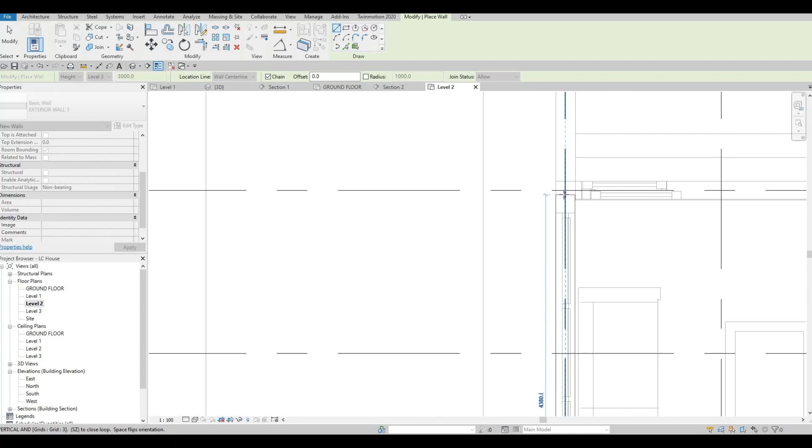So the difference between this one is what are we gonna do after we add this? It's because we're going to extend some of this, because we're going to add balconies in front of here. So we're going to add it there, and then all the way to F5 right here.

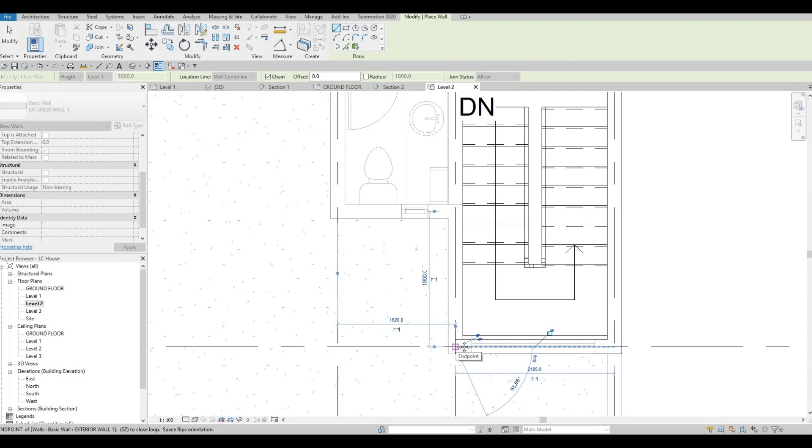So we have our stairs right here. So we're going to have it all around right here. The only difference is that once we go to F4 right here, we need to just pull it up and we need to type in 780. Once we do 780, we need to move this one to number 3 grid line.

So basically we need some space right here. And then we need to go back again right here, mimicking what we have below. So that's E3, and then going back again right here, mimicking below. And then for this one, we need to go all the way to F2, and then we need F1, and then here closing off to D1 again.

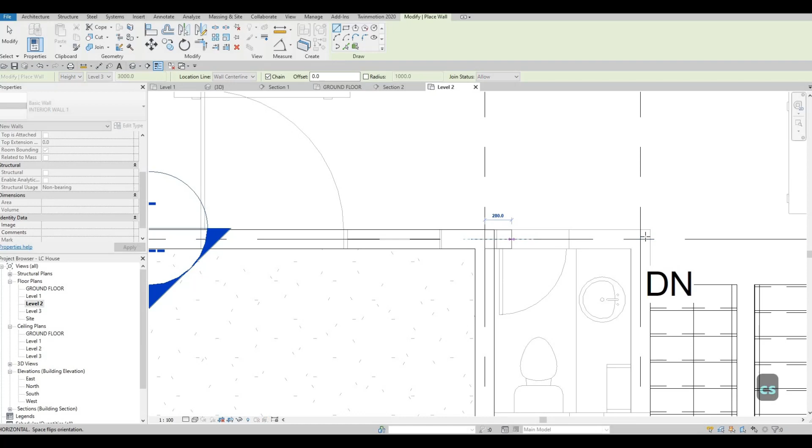So now what we're gonna do is we're going to add an interior wall similar to this. So we could select that below, CS, and then we're going to connect it as well right here to cover off the stairs. So here we have it, I believe right here.

So now we have, this will be a washroom, full grown washroom. That's why we extended it a little bit, but at the same time we cover this one, and then we have a stair right here.

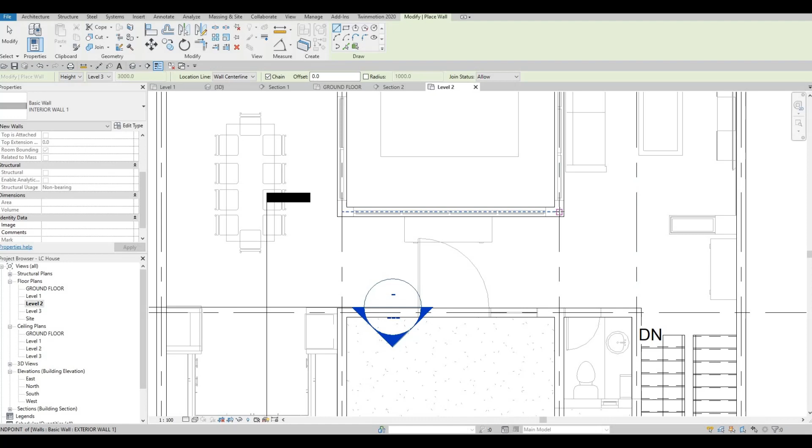Again, we're going to CS on this, and then we're going to extend this one. So let's go from this endpoint to right here, this will be our master's bedroom. This will be another bedroom right here.

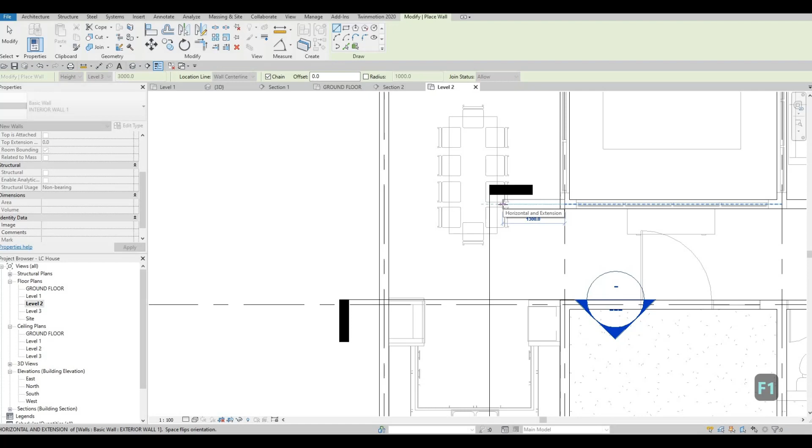But at the same time, what we're gonna do is we're going to add in a door right here. I'm estimating right now around 1,000 from here. So I'm gonna put in 1,000 and then add it there. Here as well, go 1000 and add it there, and then we're going to connect them.

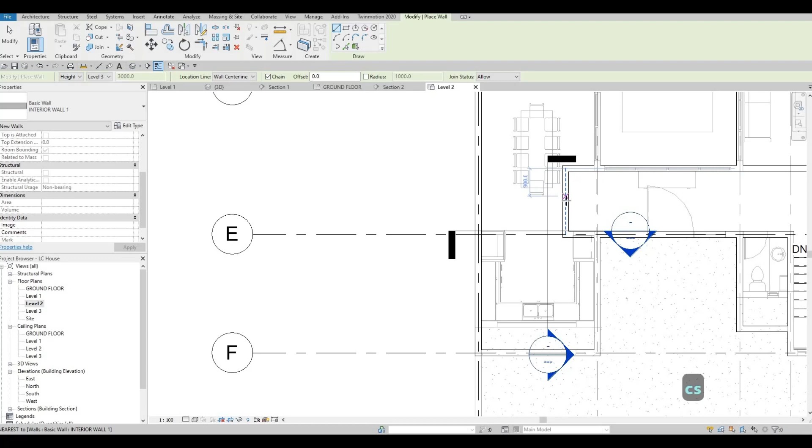And then after that, we're going to add the same one in the midpoint. So now we're basically indenting this so that it's easier for us to add in the door.

Actually, instead of 1000, let's do 1100. So why not add 1100? And then here we have the door opening right here, and then at least we will be able to use this area to add in our closet. So that's how it differs on that.

At the same time, now that we're adding all this stuff, why not add the toilet right here as well? So CS on that, and then add it right about here. So anything that we could add it now. Even the door, so that we don't look for the other doors anymore.

So CS, we could add the door right here. Even though it's 700, we could change that to 800 or 900. But you want to maintain the 2000.

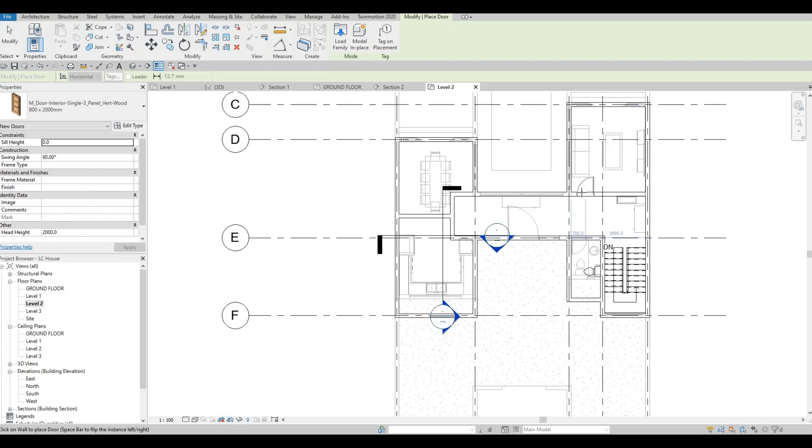So spacebar right there, and then here we could do spacebar and add it on that side. And then move this one on the other side, and spacebar on that. So we added those stuff right there, and I believe we're good enough on this space that we don't need it anymore. So what I'm gonna do is turn off the underlay by putting this to none and leaving it like that. So now everything makes sense.

So here, CS, we're going to put this one to 700 again, similar to below, and then adding it on this side.

After that, we're going to add the exterior wall again right here, and convert this to interior wall. So what I'm planning to do is we have the D here, and this one is just 500, so CS on that, just 500 from the top. This is what we're going to add in order to create a washroom and a walk-in closet for our master's bedroom. So now add this wall right here.

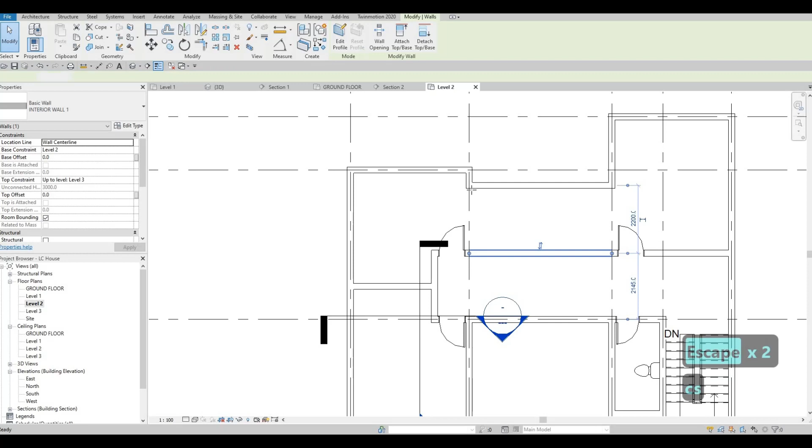We could basically move this back right there, and then change this to interior wall, and then from interior wall CS again, and just connect them all together. If you're not anal like me, you could just leave it like that and add another one right here. It doesn't really matter if you're changing it, but I just want it to be organized a little bit, and add those kind of stuff.

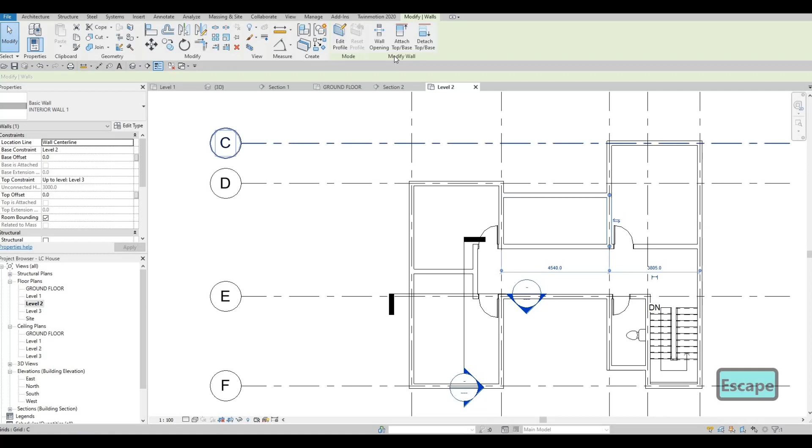At the same time, what we're gonna do is create an opening. So here I'm selecting the interior wall, and we have a wall opening right here. I'm gonna select that and add a wall opening. You need to click it twice in order for that to show. This one is easy to change — you can just grab that or put in the required dimension that you want. So it's really up to you depending on the space and how you change it. It's basically an opening for our wall, but there is still a wall there.

Now what I'm gonna do is also add another wall inside to separate the walk-in closet from our ensuite. So I'm going to select this wall, CS on this, and add it first, and then dimension it from here. It should be around 2130 — that is the space that I needed.

So I'm going to select this one, CS, add it right here. Oh sorry, so add it right there, delete this one, and then this door, CS again, and add the door right here. But we're going to change it to 700 because that's the size of the door that we want for our washroom. So now I'm just adding that. Hopefully you guys are envisioning what we're trying to do here.

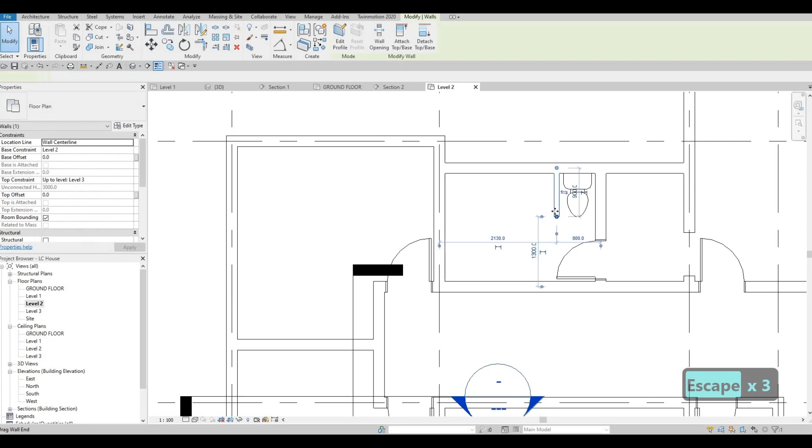I want my toilet to have a separation, so I'm gonna add in a small wall, probably 100 thickness. So select that, edit type, duplicate. This will be wall, interior wall number 2, and change the thickness to 100. At the same time, I'm just going to add it right here. So change this one, I'm just gonna add that right here first, and then change this back to number 1. So just my sequence messed up there, but that's good enough.

And then here I'm planning to add a freestanding tub. That will be very nice to have, and I'm planning to make this nice. And just because it's ensuite, double sink here — I'm planning to add a double sink as well. I think that will look nice to have a double sink. And then let's add in the same design that we have probably.

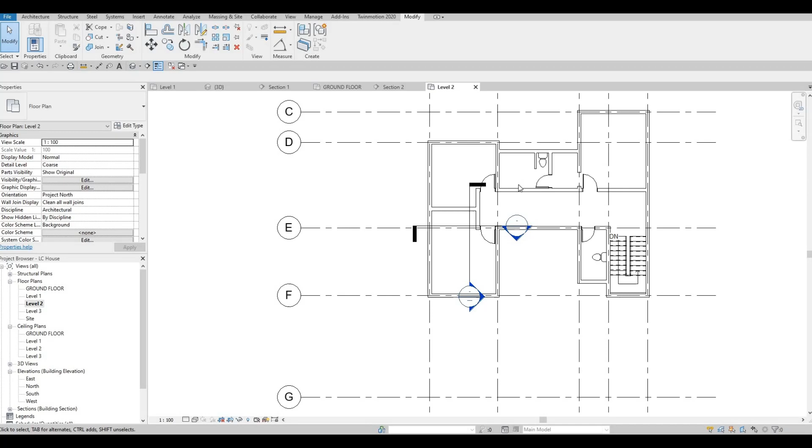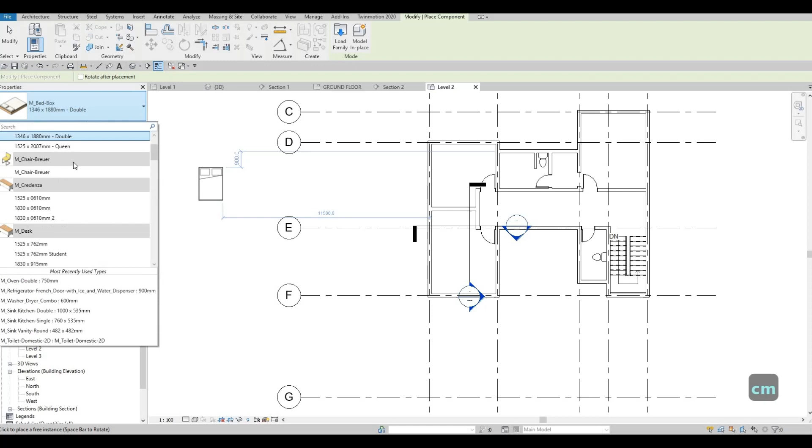So in order for us to see it much better, I'm planning to insert the bed. Let's go to insert, load family, and go back to furniture. Go to the main and look for furniture. We have beds here, and I usually just use this one. Click on open, CM, and then we have the bed right here, but we're going to change it to double.

So that's why I go to the drop down, and then let's add the bed like so. And then I'm just trying to add it properly and then spacing out. So this part, this will be the extra room that we have right here.

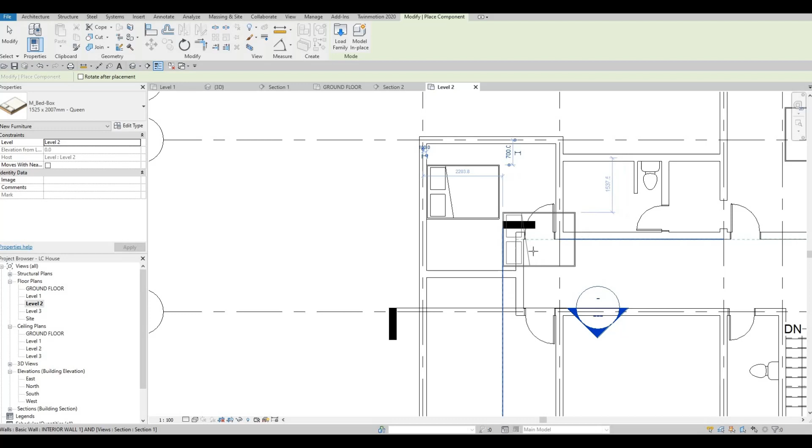I'm still thinking because we extended it too much. Maybe we could extend this one so that it's not too much of a burden for this space right here. I'm just trying to extend a little bit of this space right here. So why not.

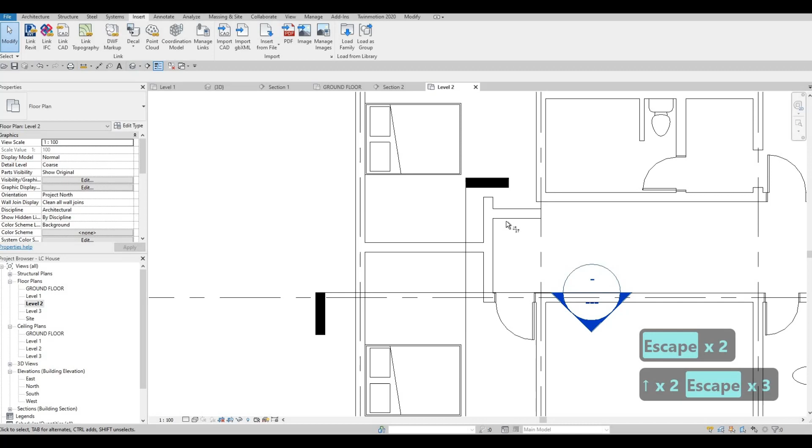Delete this first, move this back, and what I'm gonna do is select this exterior or interior wall, CS. I'm going to add it right here so that it's not too much of us, because I'm seeing that it's just gonna get too much space right here. So I'm gonna trim this, and then we could just extend this one right there.

That small gap here, as you can see, is giving us more space here for the closet. So I'm just adding that in order to make this one a lot better in terms of look.

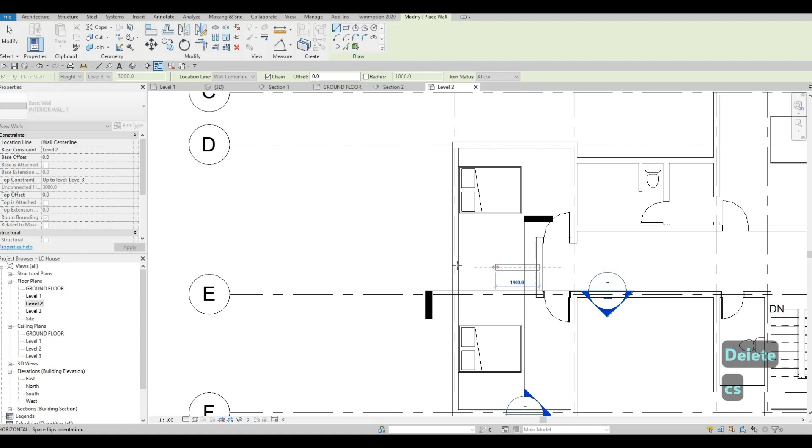And then this one should be placed in the middle. I'm gonna delete that first and then add it again with the midpoint there, right there. So now they have a balance because we have more room right here, as you can see, for the closet.

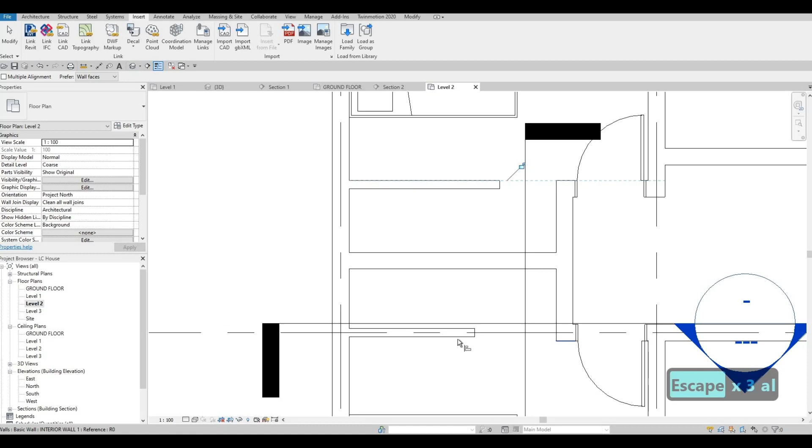And then this one will be closet. I'm gonna use this one to show as a closet. What I do is I add it first because this is a different size or thickness. What I do is align it, AL, align it there. I'm gonna align it here as well, and then now we could just join them all together. It's a lot faster than doing something else.

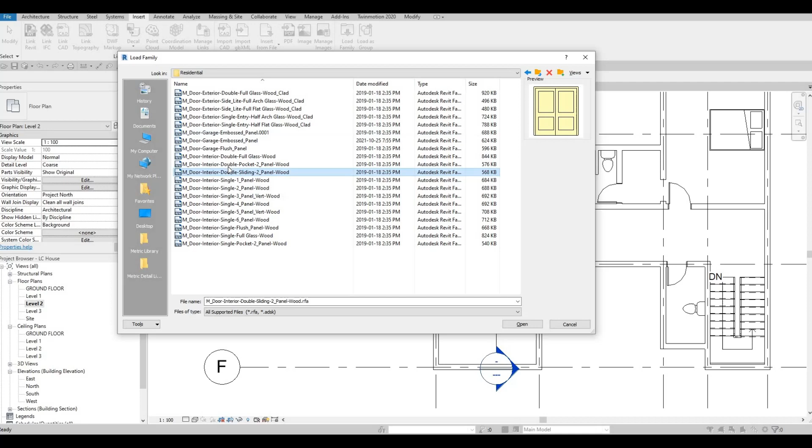So now we just need to insert some doors. Go back to the main and click on doors, and then for sure we have some sliding door right here that we used before. So here I'm gonna use sliding door right there. I'm gonna load everything because I want all the variation that we could have, and then type in DR.

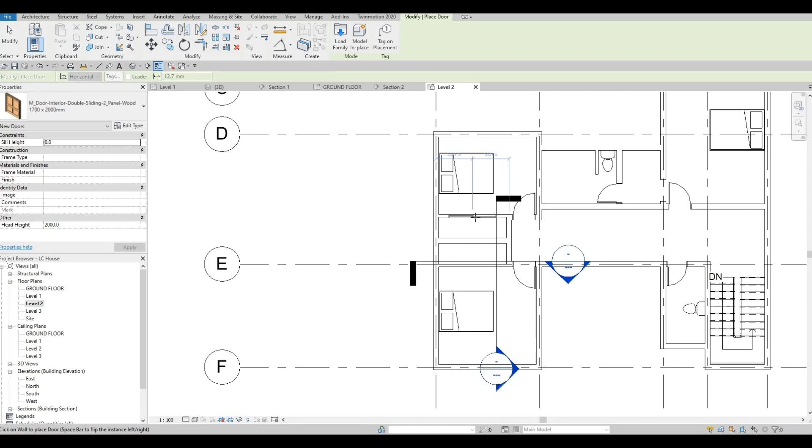The smallest one is the one that is appearing right now. Maybe we could put the 1700 first. 1700 is good enough, and then let's just add it right there.

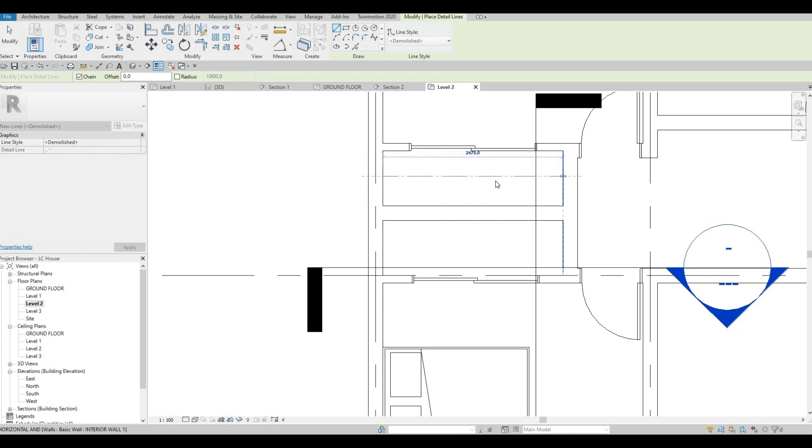To showcase the rod, we need annotation, and then we need the demolish line because we don't have dash line at the moment here. And then just add that demolish line to represent the rod, and then the shelvings as well.

And then here we could have an entertainment system, like TV and whatnot, and then we could have this one as well right here. So that will look nice.

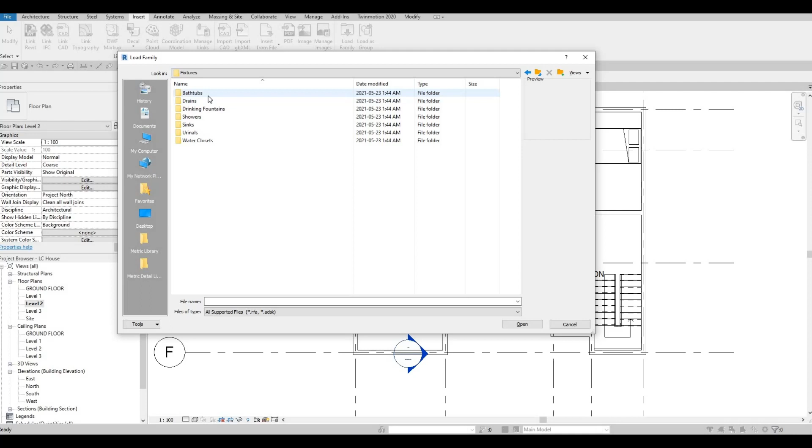In terms of the tub and then the sink right here, what I'm gonna do is I'm going to insert the tub first so that everything looks proper here. Plumbing, architecture, fixture, we have bathtub, we have freestanding here, so let's add that first. CM, and then that looks perfect right there.

And I'm planning to give it some nice window right here so that it's overlooking, and obviously there's gonna be some privacy there, and then we're going to have a nice window here as well. So I'm planning to add a nice window here.

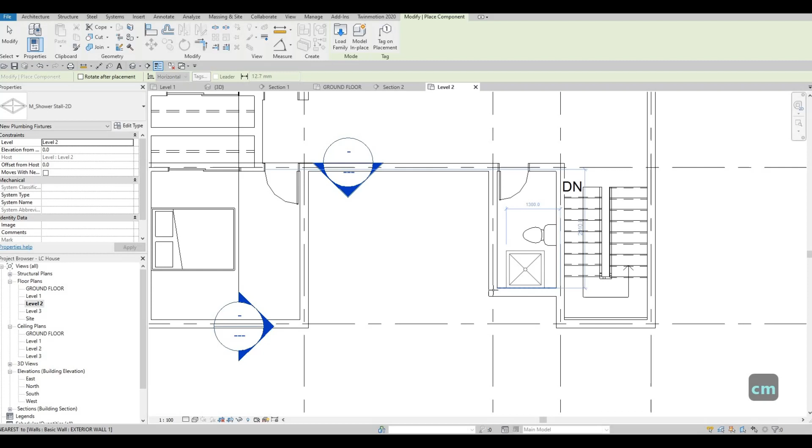And then in terms of the shower, we're just going to use this shower for now. We're just using this one anyway, so we're going to add this one.

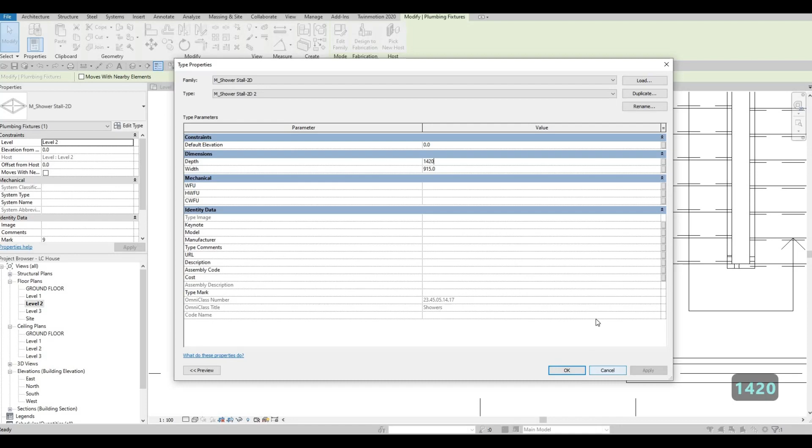Click on dimension to know the dimension of the inside right here, 1420, and then edit this one. You can duplicate it if you want to, and then 1420 on one of them. Maybe it's the width or the, so depending on that, you could just rotate this one.

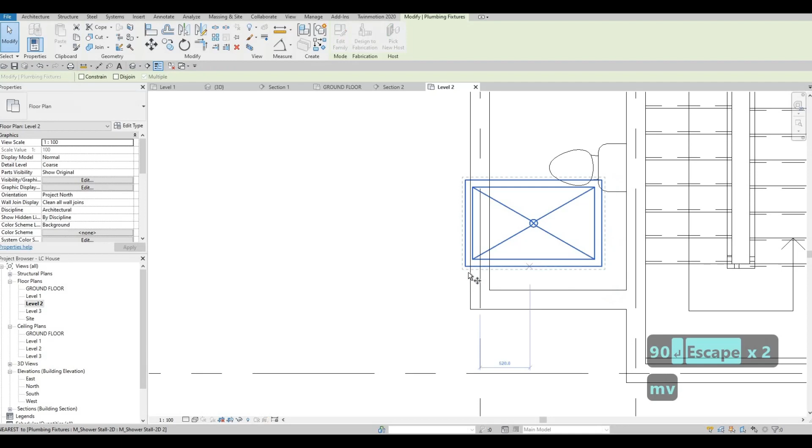180, sorry, 90 degrees, not 180. And then after that, you could just grab it, move it, MV, and then move it from the corner. So that will be perfectly fit there.

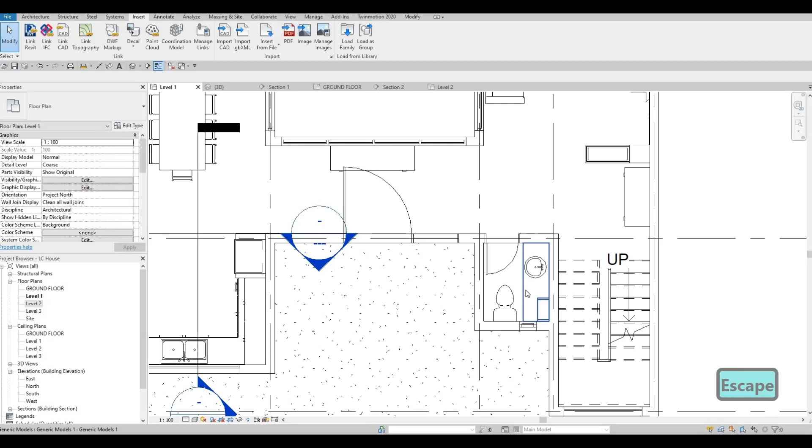And then the sink - because we did the sink right here, as you can see, we have our extrusion. This right here is not an annotation, but we really built this. It's up to us if we want to add the same thing here or change it a little bit. But knowing that I showed it to you, why not just add the detailed line?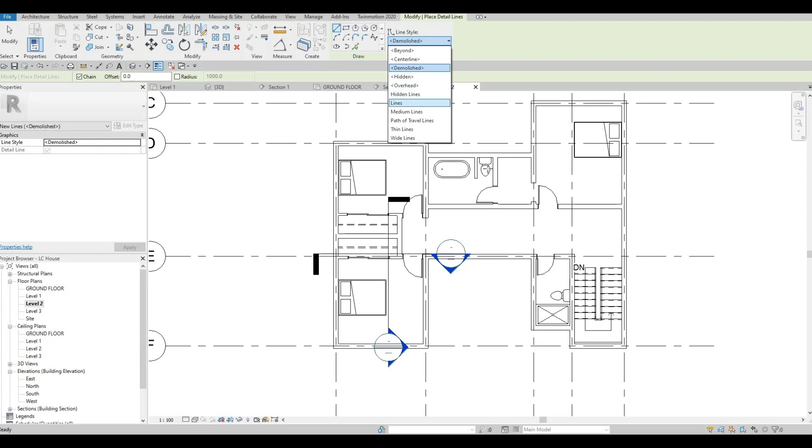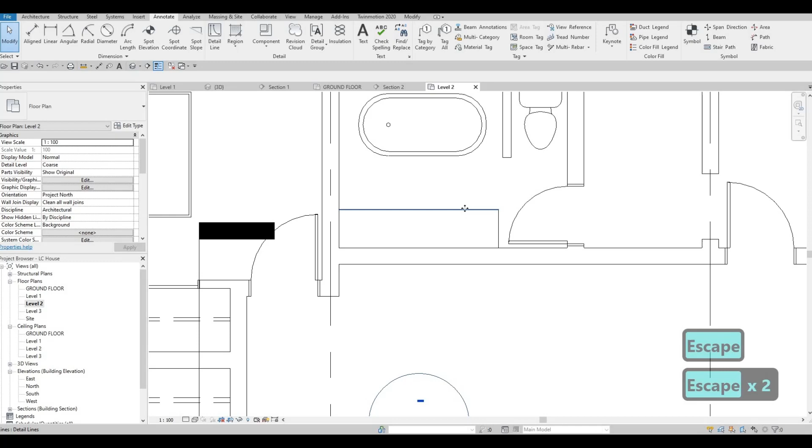So we're gonna use thin line just to represent the top there. Not the line, but thin line is much better. And then obviously that's too much. We could just change it like that, eyeball it, and then add in the sink, the same sink that we have below, to represent that.

I'm gonna go here and then create similar on that, and then add it right here to sink as well. Why not? Because two of these rooms will use one of this, and then obviously the master will have its own. So now it will look like that.

And then I want to showcase something right here as well. So I'm going to use detail line, thin line first to do a U shape right here. And then after that, let's change this to demolished line and then add - sorry, undo that - and then add a demolished line again.

All around. We can even offset this so that it's easier for everyone. Let's put 50.

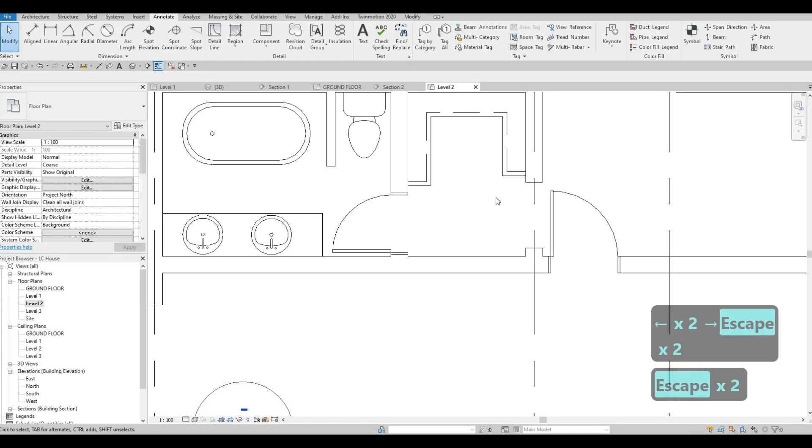And then use trim and extend to trim everything else. So I'm happy with what we have here. Select those parts and just leave it like that. And then we could just move it like that and have it like that. I think that is looking good right now. I'm just gonna double check what it looks like right now.

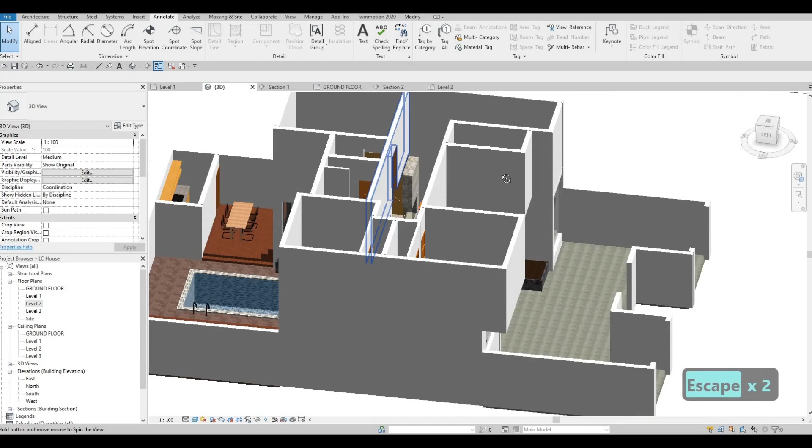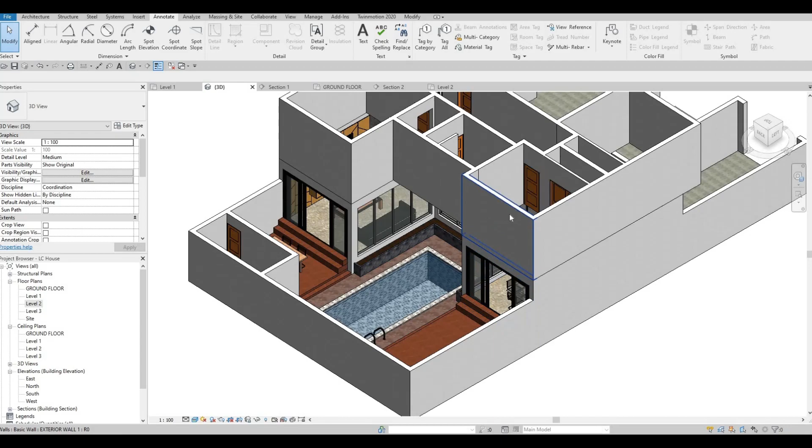I'm planning to have all glass right here to overlook the front, and then we have a window right here to overlook right here. We will have its own balcony on this side, and I'm still thinking of adding a balcony right here as well so that everything looks incredible, and then everybody has its own balcony.

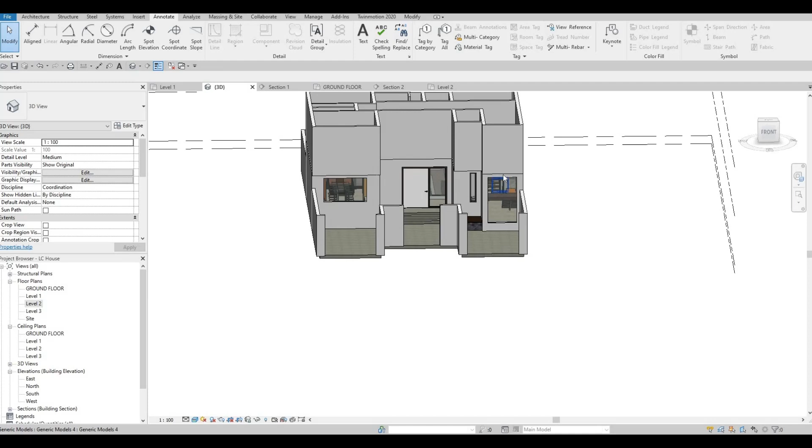So I'm probably just going to add that, and then probably a piece similar right here to have. So I'm gonna copy this one, and then this will be an opening. Actually, because we have the wall right there, we could just add it there and then use cut geometry now, and it will cut it as well.

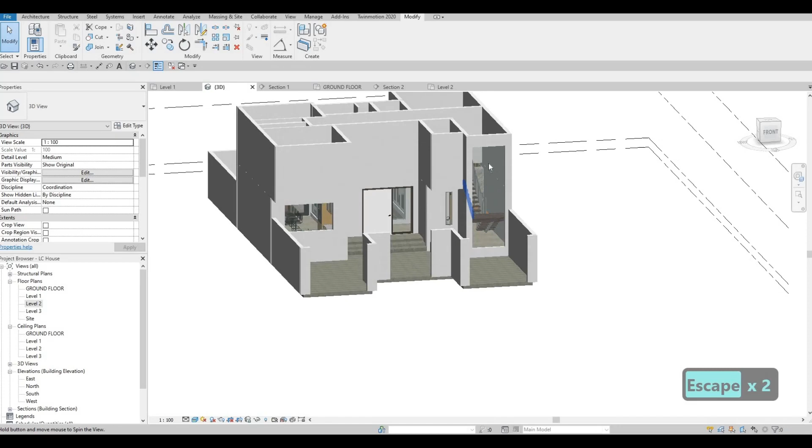And as you can see, one big one, and it's overlooking, and then we could just design it a little bit. So that's what I'm planning to do, design it a little bit. You could use a vertical, and then the horizontal is singular, and it will be random on all of it. That's looking good.

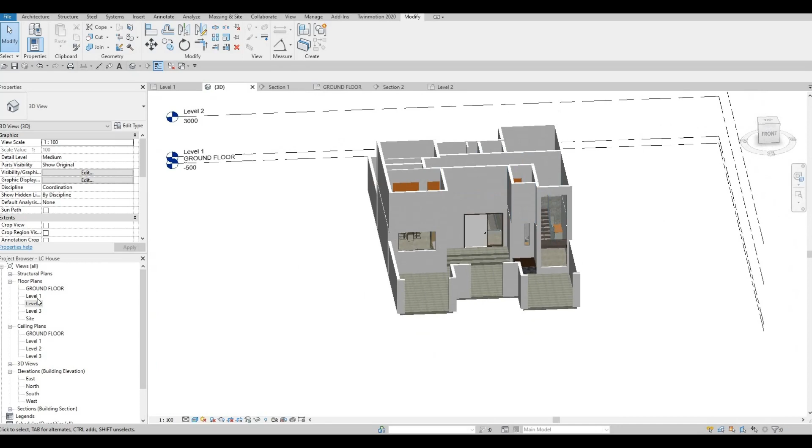Let's go back to level 2, and then let's add - so let's insert load family. Let's add some side table to make it look nicer here. So we'll need furniture, table.

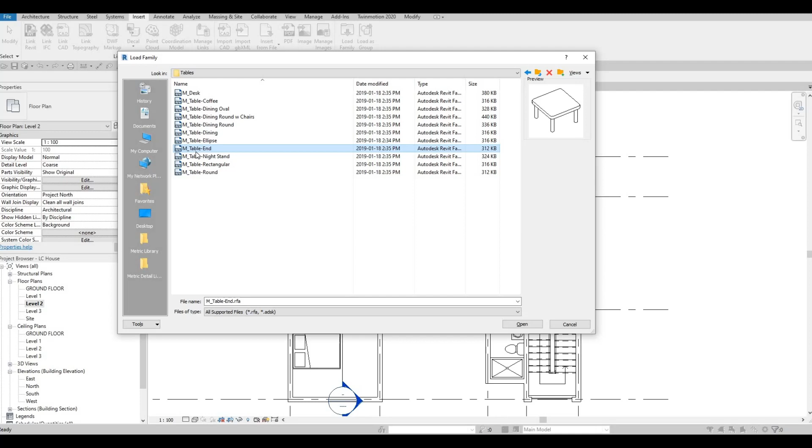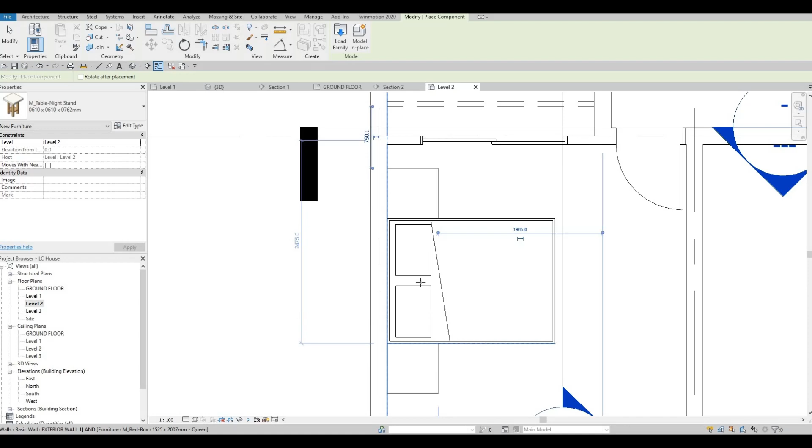And then let's add in a nightstand table, CM. Then let's add it on all ends like so. So we're adding it right there. And then we could add in a lighting on the side.

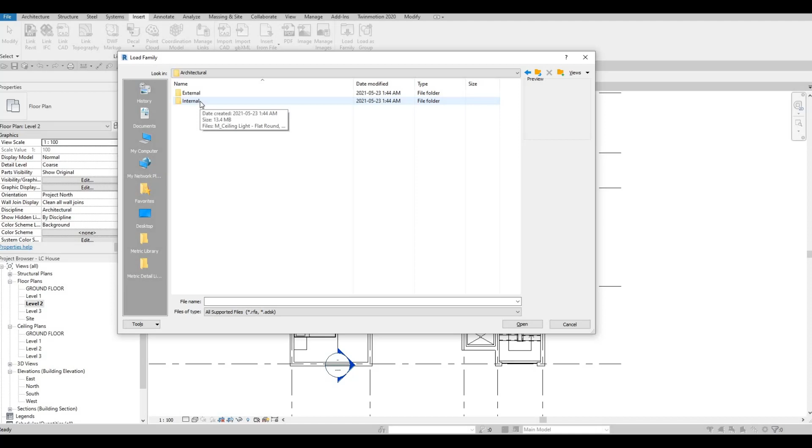So let's add in the lighting. So let's go to insert and then load family, and then go back here and look for lighting, architecture, and then internal. And then let's look for a table lamp. So this one should be good enough. And then CM, add it right here.

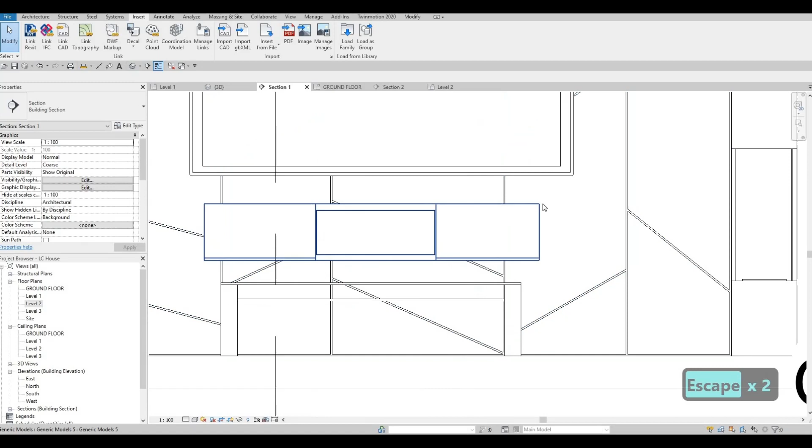But we need to double check that because it's not on the proper level. So what we're gonna do is double click here and then go up there. What we can do now is AL, and then AL there. So now it will put it in the proper height. So it will be 762 from the elevation.

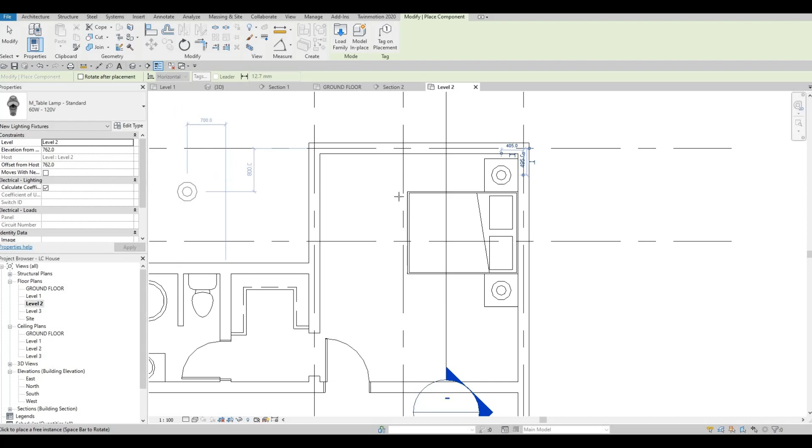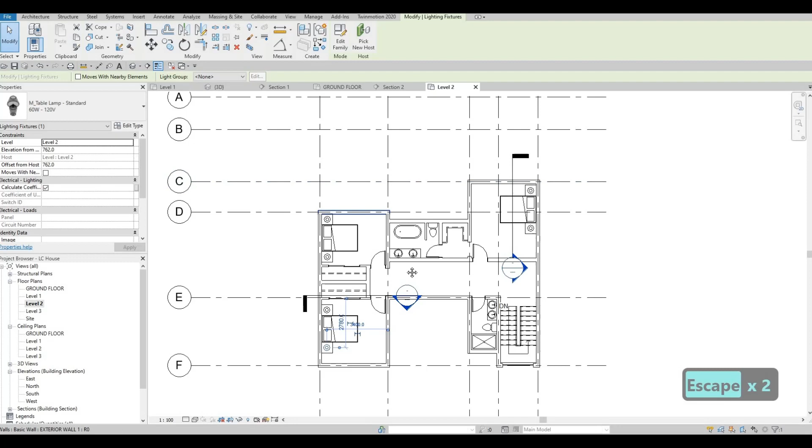Luckily, we're gonna select that, create similar only, and then just add it right there. It will already register the things that we changed on that height. So that's why create similar is very useful in order to add everything instantly. So now if we check here, 762, it's in its proper elevation as well.

So let's stop here for now and continue in the next video.